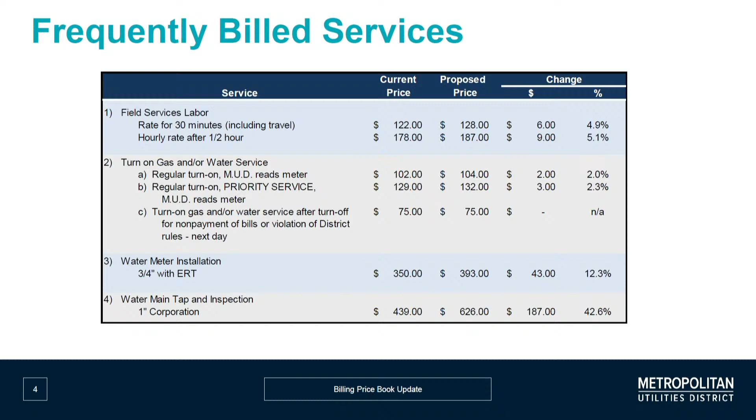Stephanie? Can I ask a question on number 1, field services labor? If I recall right, Bonnie, our contract gave them a 3.5% annual increase in their wages this past year? 3.25.

For their annual rate merit increase or for salary? Correct, for the general increase. Okay, and this is going up higher than that. Is it because of the all-in cost, benefits and everything else included? Yes, that is all included. Vehicle amount, we charge a vehicle rate, that's also included in that as well. So it's an all-in cost? Yes, that's correct, thank you.

Okay, on the next page, I'd like to discuss the more significant price increases being proposed, and these are defined as those increasing more than $200 or more than 15%.

Item 1 reflects the price of the damage to a special locking device for gas and water service. This price includes the cost of the lock as well as the labor for the field service technicians to perform this work. Again, this price increase is driven primarily by the cost of materials.

Item 2 is the installation of a 5/8-inch and a 1-inch water meter with ERT. As previously mentioned on the 3/4-inch water meter, the increase is driven by the increase in the cost of materials. Again, these materials are installed in newly constructed homes and are typically charged to the builder and not directly to the homeowner. Item 3 reflects the fee for the tapping and inspection of a water main with a 3/4-inch corporation.

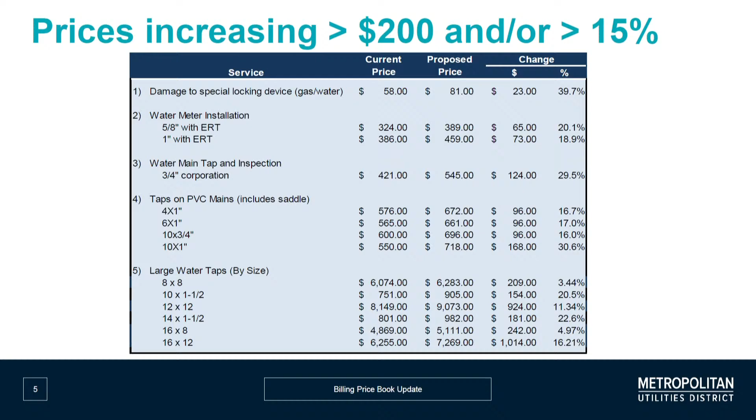And then finally, following board approval, we'll place the revised billing price book on the external website with an announcement that the fees will change effective June 1st. This will allow customers and contractors to review pricing in advance of the June 1st effective date.

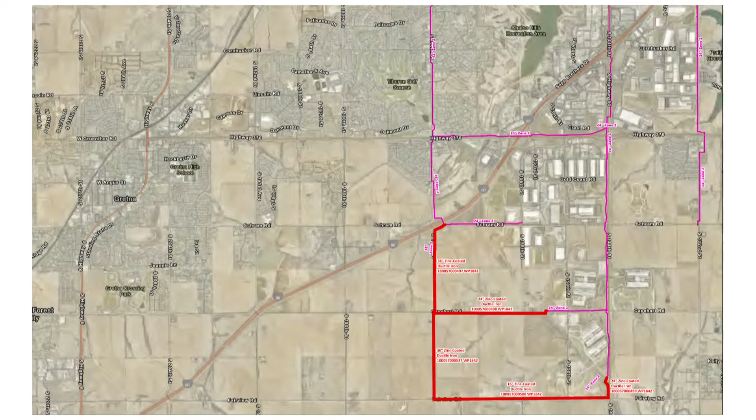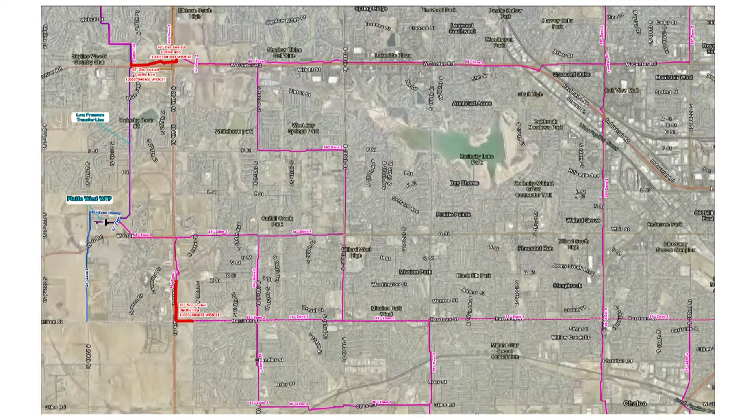These 3 projects combined total just over $16.5 million in construction costs, and added almost 5 miles to our transmission main system, ranging anywhere from 42 down to 16-inch ductile iron pipe. The total cost for all of these jobs came in at just 0.1% above the original contract value, and they were all successfully completed by Judd's Brothers Construction.

At this point, I'd like to give a shout out to Nick Clifford, a big thank you to him. He's on the plant engineering team and did a really nice job managing all of the construction on this. Also, Bob Taylor in our water department, who's been running this master plan, and this is a big piece of all that coming together.

The couple other projects I want to highlight, items D and E, were new development projects. One was in the Cherry Creek area, right next to our CC2 construction area, and the other was in Woodbrook Valley near 180th and Ida. The 2 projects totaled about 2.25 miles of 6-inch and 8-inch main added to our system to serve these development areas. Both were successfully completed by Cedar Construction.

The last item I'll bring up is item G. This project was to recondition a low service motor, the number 2 motor at Florence Treatment Facility. The initial base bid was just to pull the motor, get it hauled off, and then they had to tear it apart to see what all needed to be done to successfully rehab that motor.

We did get alternate bids up front for some common items we would do on that. After they disassembled, cleaned, tested everything, and finally painted it, the additional scope to get that motor rehabbed came back, and that's why you see a little bit higher percentage-wise on the bid. But the total amount was $150,000, so we still came in favorably on that one.

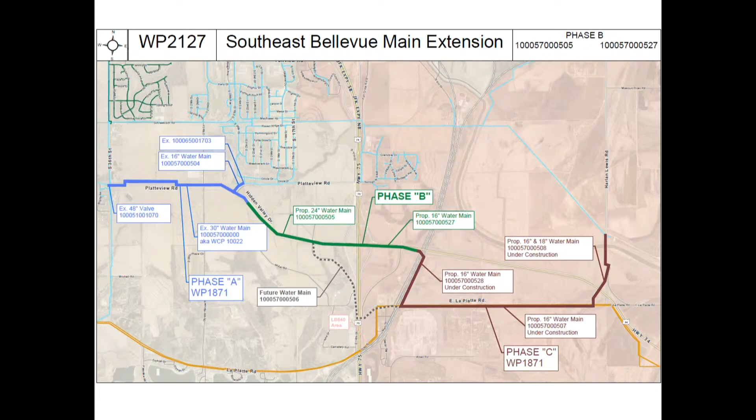I've got another map, and I'd like to highlight the last project, number 5 on the letter. This project was previously approved by the board at the September 2024 meeting for $2,879,900. We used historical costs with similar scope and size to present that to the board previously.

The project has since been bid and costs have come in higher than previously approved. Therefore, we brought the supplemental CNA forward with the updated cost around $3.48 million. As part of it, the district costs increased incrementally around $570,000 as the district is pioneering this 24-inch water main on the project.

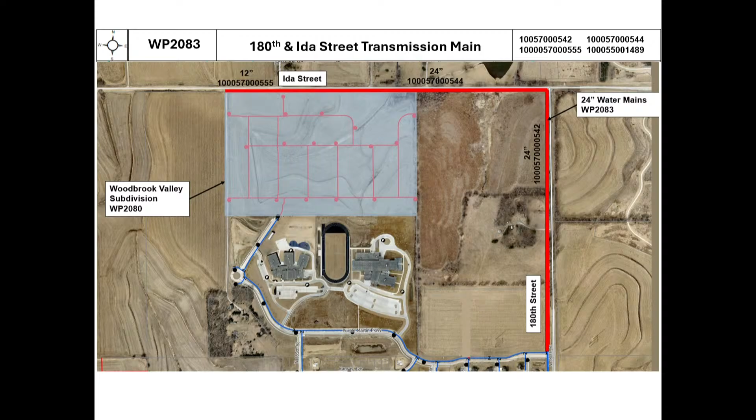We've seen more of this recently with some costs coming in higher than historical costs have been, and the engineering team is making adjustments to those estimates to reflect that, especially in some of these corridors where there's future grade cuts and fills for future road improvement. That way we make sure we're not coming back with more relocation projects than necessary. That's all I have to present, and I'd be happy to answer any questions.

To start with our gas system, we began in 2008 with over 560 miles of targeted gas mains. Today we have roughly 76 miles remaining. The Gas IR program is managed by the Gas Design Group within the engineering department.

Pictured here is what our original gas targeted system looked like in 2008, and today you can see the remaining mileage. In orange, we've highlighted our projects for 2025, and I'll show that again. So here's the 560 miles of targeted cast iron gas mains, and here's our system today. You can see the vast amount of work that has taken place over roughly 17 years - it's almost like repiping a small community.

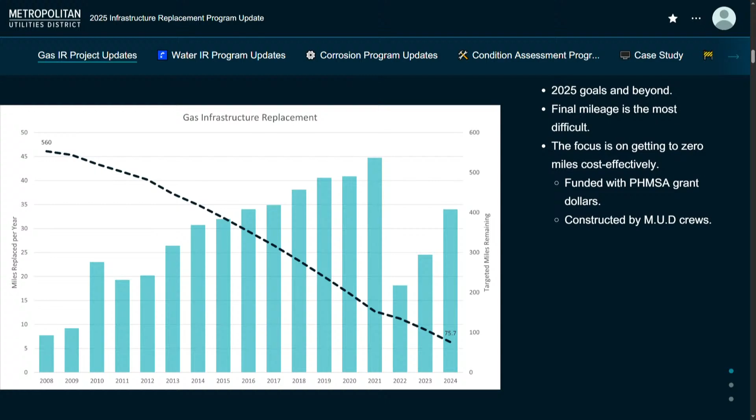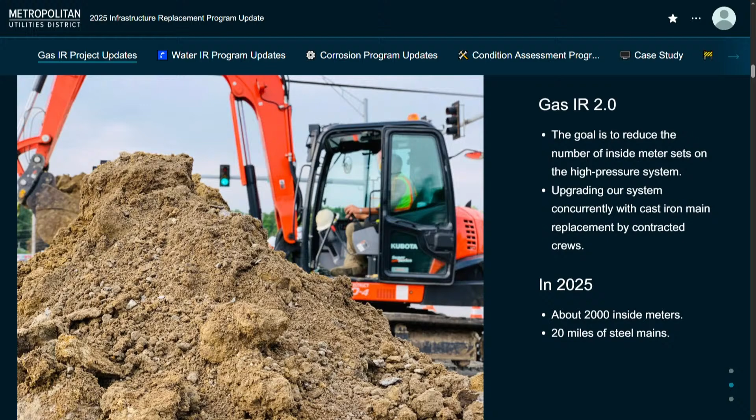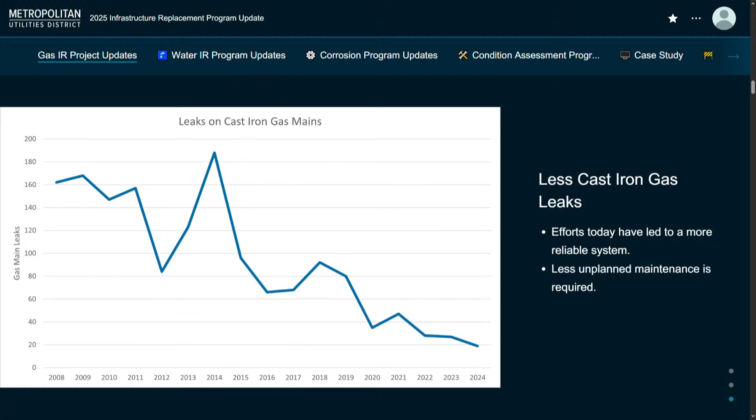If we look at the impact of the cast iron gas replacement program with regard to leaks on that system, we can see the dramatic effect it has had over time. Just looking at this visual doesn't do it justice. Speaking with folks who have been around during that spike in 2014, a gas leak is much more disruptive on a cast iron system than a normal leak today. So there are added benefits to this program not shown in this graph - we have a more reliable system today with less unplanned maintenance required.

Evan, for 2.0, what's the timeline? Has that been established yet? That's a great question - I might have to look, but about 10 years on that program. Okay, thank you. Yep.

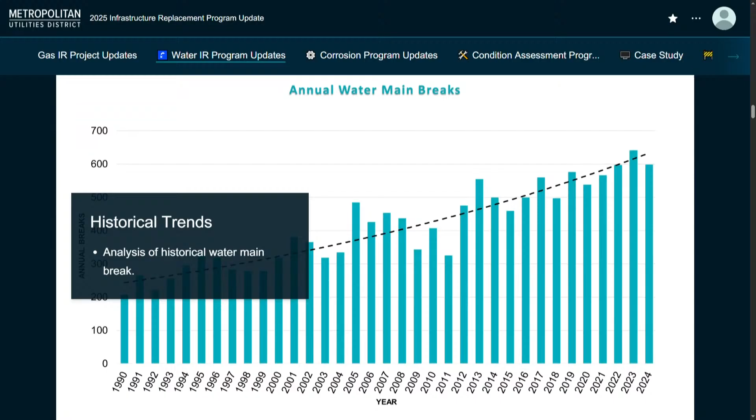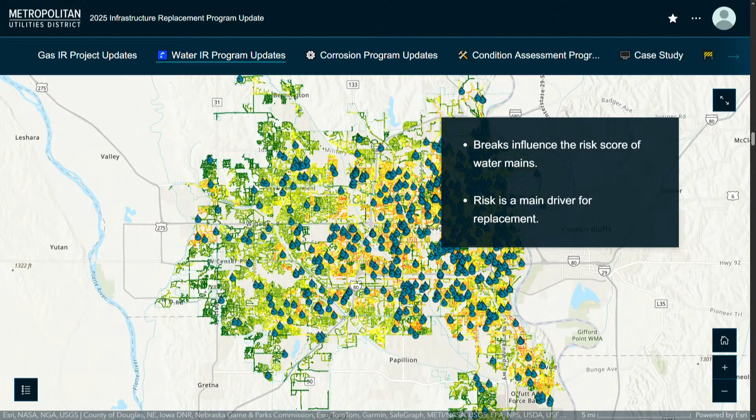We had a total of 598 breaks in 2024, and you can see the distribution of those across our system in this graphic. With each main break, our construction crews collect data while they're out in the field. Our team gathers that data, analyzes it, and puts it into our GIS system so we can visually see where our highest risk mains are. Every segment of pipe in our system, we assign and calculate a risk score, pictured here, which we can then use to target main replacement.

In 2024, we replaced about 16.6 miles of water main. In 2025, we're planning for 17 miles of replacements. We're continuing to refine our designs and installation methods, refocusing our condition assessment program on some of our higher consequence mains - I'll touch on that later in the presentation - and continuing to plan to increase our water main replacement goals.

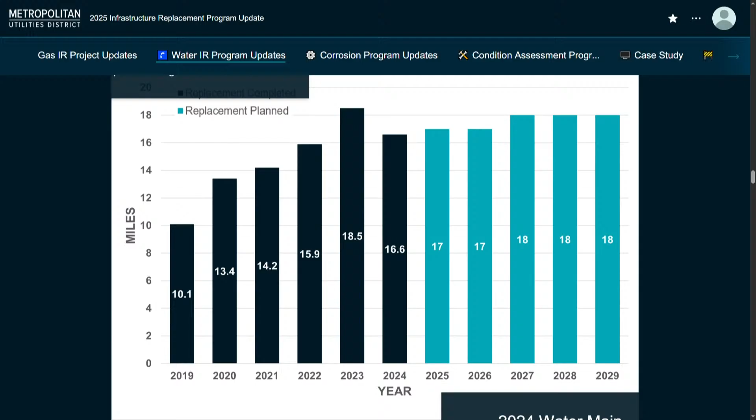Evan, on the 2025 target of 17 miles, how much is M.U.D. crews and how much is outsourced? So we're planning on 7 miles with M.U.D. crews and then 10 miles with contracted crews. Thank you.

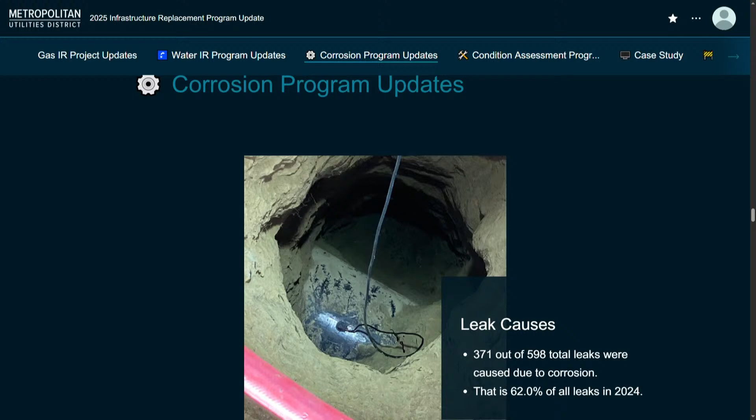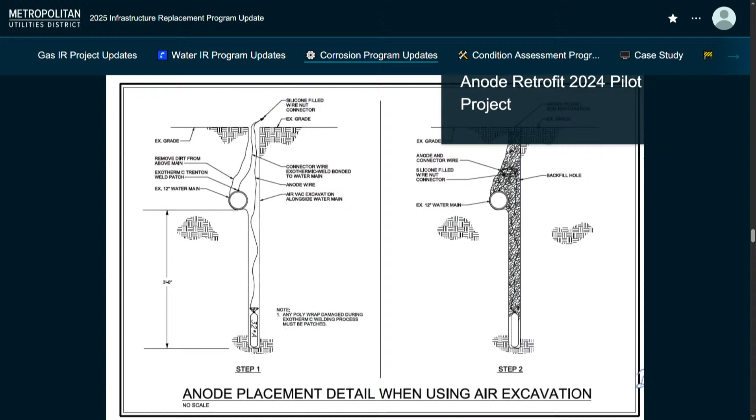Give a quick update on our corrosion program. A majority of our water main breaks are due to corrosion, so I wanted to highlight a pilot project we did last year. We performed an anode retrofit project, basically installing a sacrificial anode on our water mains that can protect them from corrosion. This isn't new technology, but the installation method pictured here is new to the water side, where we can pothole and install these from above ground in a more cost-effective manner. It's another tool in our tool chest that we'll continue to look at going forward.

Now I'll highlight the condition assessment program. We continued with our program last year in 2024 with both distribution and concrete main inspections, pictured visually here. I'll show some of the history of the condition assessment program. We've been doing concrete main inspections for a while, and you can see the number of miles we've done in the past. In 2021, we started exploring condition assessment of other materials, cast iron and ductile iron, and we continue that today.

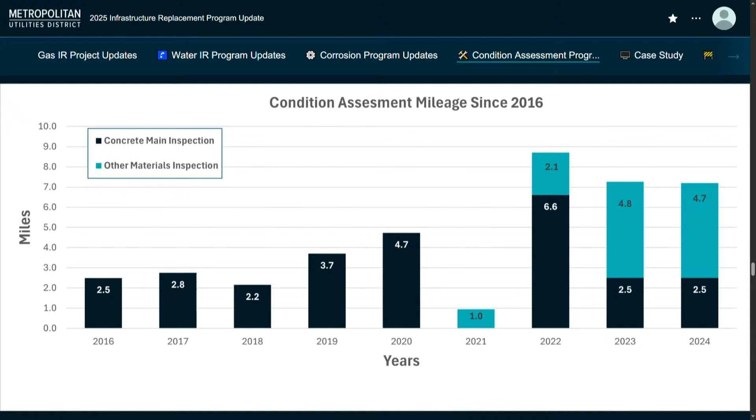Pictured here is the Pica SeeSnake inspection we did last year on a 12-inch cast iron main. We inspected about 1.5 miles. We get some really granular data with this type of inspection, and our MUD crews assist with the installation and the inspection as well.

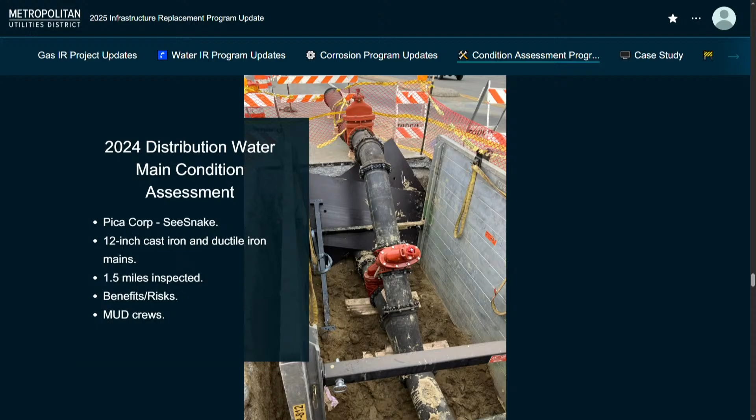We piloted the Mueller E-Pulse condition assessment on some of our smaller diameter mains. We did 3.2 miles of inspection. It's less granular, but has lower impact on our customers and crews for that type of inspection. So we're looking at a variety of different inspection methods.

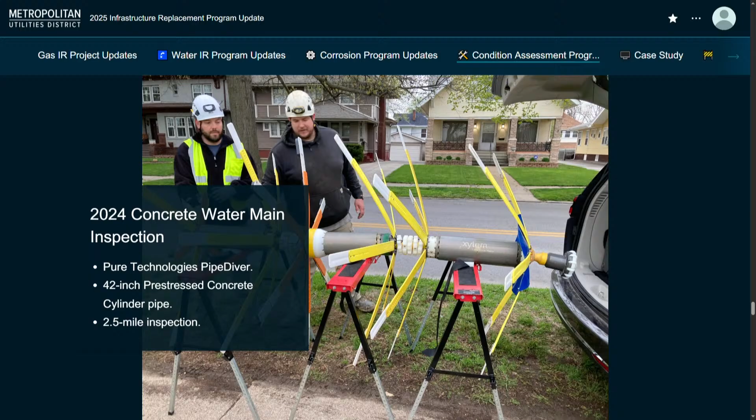Also in 2024, we continued with the concrete inspection using the Pure Technologies PipeDiver, as you've seen pictured before. We did a 42-inch concrete main inspection, about 2.5 miles for that inspection. Pictured here we have the insertion of the tool, and then this is the extraction of the tool.

Now, the case study I mentioned earlier on the inspection that started at Field Club—this was an inspection on a 54-inch concrete main that went from our Field Club reservoir to our 36 and Edna pump station. It was about 6.5 miles of main that we inspected.

I wanted to highlight some of the financial analysis we did. At a high level, replacement of a 6.5 mile, 54-inch main would be probably north of $60 million. We looked at the actuals for our inspection and repair cost, and those are around $900,000. So for about 1 to 1.5%, we can inspect and repair a main of that total replacement cost. I wanted to highlight the real benefit of this type of inspection.

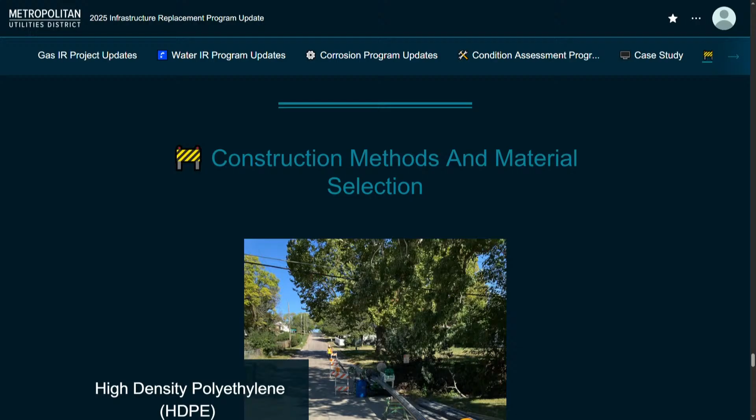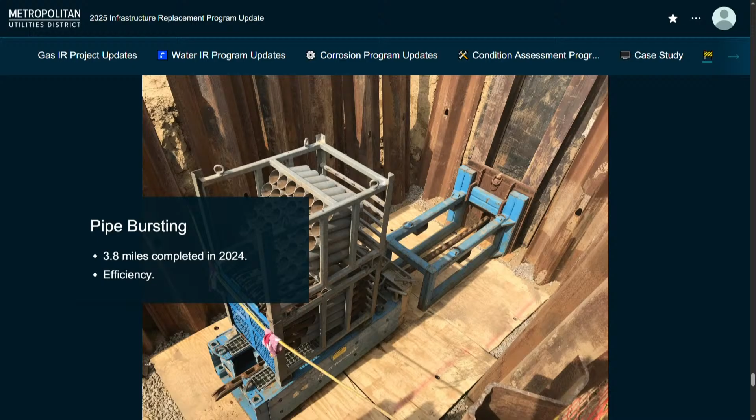We continue to look at construction methods and materials. Pictured here is one of our HDPE projects. We're continuing to use that, seeing benefits with design, constructability, cost, and durability of that material. We're continuing with our pipe bursting program—we did 3.8 miles in 2024. I'll just touch on those at a high level, and with that, I'll open it up for any questions you may have.

Evan, you said on the gas side we had a target of 17 miles replacement? I believe it's 12 miles for 2025 for the cast iron. Did you say gas or water? I said gas, but I'm getting to water. So for water, you said it's 12. How much is MUD and how much is third party? So for the gas side of the 12 miles, we're going to be doing all MUD crews for that 12 miles. For the gas IR 2.0 program, that's going to be contracted out. So MUD is planned right now to complete our cast iron program with MUD crews.

Thank you. All right, thank you. Thank you.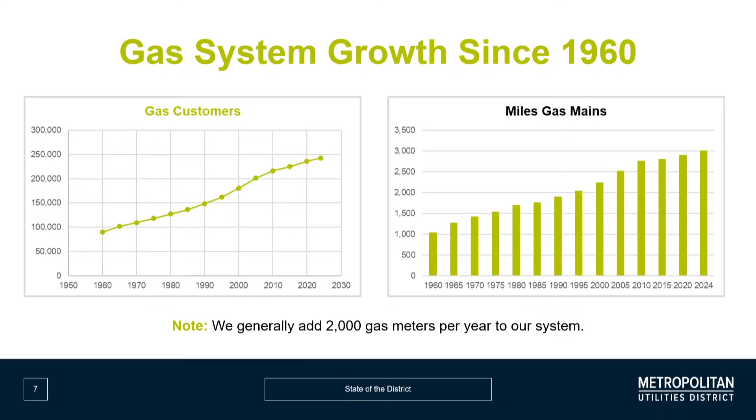Something that Vice President Jim Knight shared with us back in February when we were running the LNG plant. It got really cold around the 20th—I think February 19th was a Wednesday—and that LNG plant put out 97,000 decatherms in one day. I have to look back, I need to be sure I'm right on this. You sent it to me, so... but it was a long time ago.

Yeah, I'm sure it's right. So that day, or the next day, we were expecting maybe 350,000 decatherms—don't worry about the units, it's a lot—and a record would be about 397,000. So we were bumping up against 350,000. That LNG plant was able to produce 97,000 decatherms, which is a record, right out of the gate for a new plant. The previous record was about 60,000 decatherms, which I think was capacity, maybe. And the difference in the cost of gas—go ahead, Director.

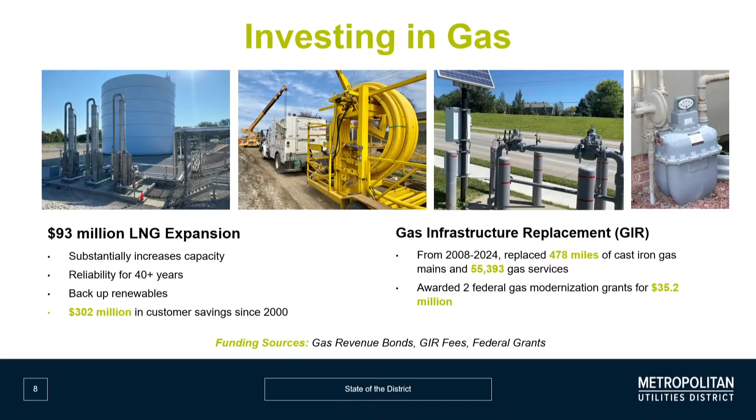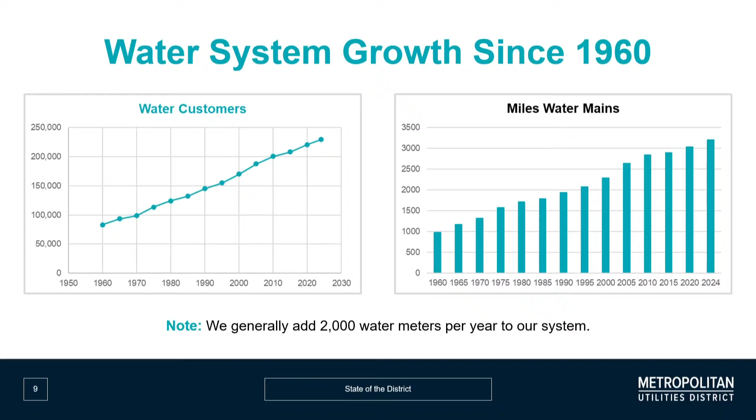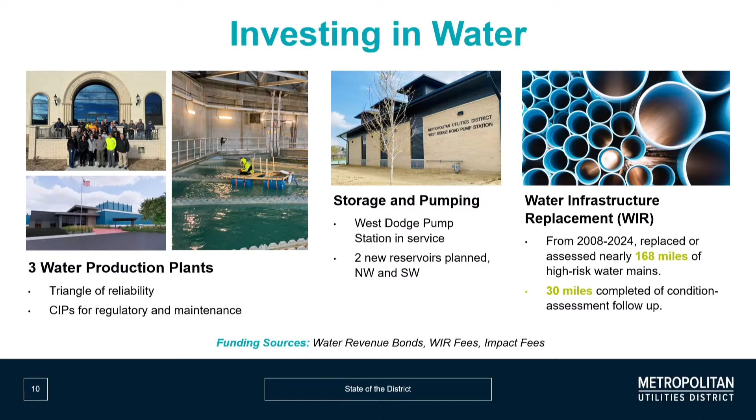Doug Whitfield told me that Florence is at full capacity. Is that right? Correct. Vice President Whitfield informed me that Florence is at full capacity. That's really something. As you know, we went through a really difficult, long needed upgrade, and had some unnecessary disruption that put us into mandatory water restrictions. Now we're at full capacity. That team worked really hard, and I'm happy to say we're in much better shape now, and kudos to the entire team.

Storage and pumping, you know we opened the West Dodge Pump Station. We have two other reservoirs planned, and I think we've updated you on those recently. And then Evan covered the water infrastructure replacement program. I don't need to, he did part of my job here, so that was nice.

Lead water service replacement, LSLR: detect, correct, protect. I think we've talked quite a bit about this, thank you for your support on that. We are funding the replacement of customer-owned water services that are made of or contain lead. We're well on our way, major team effort. We're learning a lot as we go. I'll leave it at that.

As you know, you approved some four bids, either last month or the month before. So we're definitely ramping up. I wouldn't say we're full steam ahead, but we don't know what full steam really is yet.

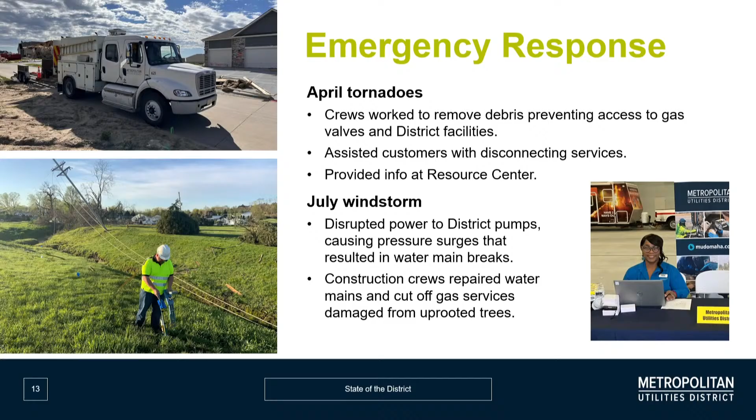We had 13,330 emergency gas calls. Of those 13,330, 1,170 were coded emergencies, meaning we need to dispatch and go. To put it in perspective, that difference meant about 8,775 fewer minutes to respond to all those emergencies than it would have taken in 2015, or 146 hours.

So that makes us all feel real good. It doesn't just happen, it takes an entire team effort from top to bottom. There are so many aspects of emergency response, whether it's water or gas, and these are the kind of things we measure and you should feel really good about, because we can't do it without your support.

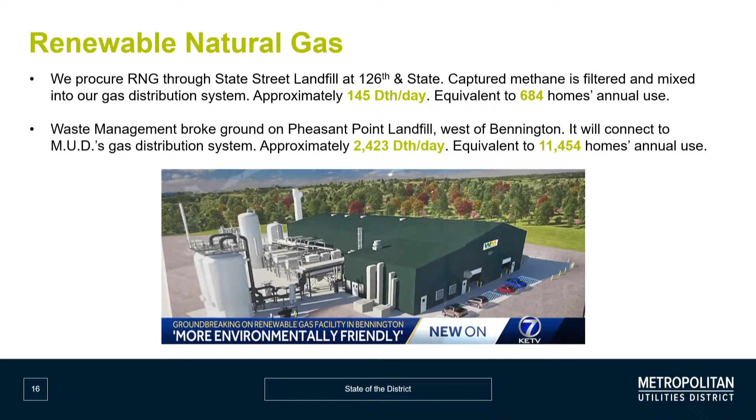And then the CNG aspect of our business continues to grow. That wasn't what we thought it would be initially. It's not a residential application, it's a fleet application. You might see the UPS brown trucks running around town that say natural gas on the side of them. A portion of our fleet, buses, big trucks, that's the equivalent of 5,281 homes. And it's going to grow, there's a new engine out that's going to make that even better. It's going to continue to grow.

Yeah, we'll just see how it does grow. It's good that we don't have to go out and market it like we did initially. It comes to us because we're ready for it.

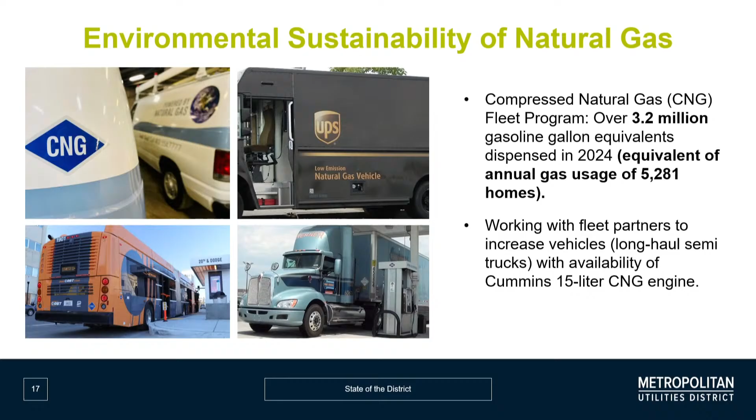Okay, I want to talk about customer satisfaction. We use a survey to try to determine the Net Promoter Score. Very simply, of all the survey respondents, you take the best feedback and the worst, and you subtract them, and you come up with a Net Promoter Score. We're asking our customers what they think on a myriad of issues, and we'll take action accordingly. We're trying to evolve this into where we're not overdoing it and not underdoing it.

But if you go to the next slide, you'll see that our response rates have increased. The number of promoters, or the best responses, has increased last year on that feedback, and the detractors decreased.

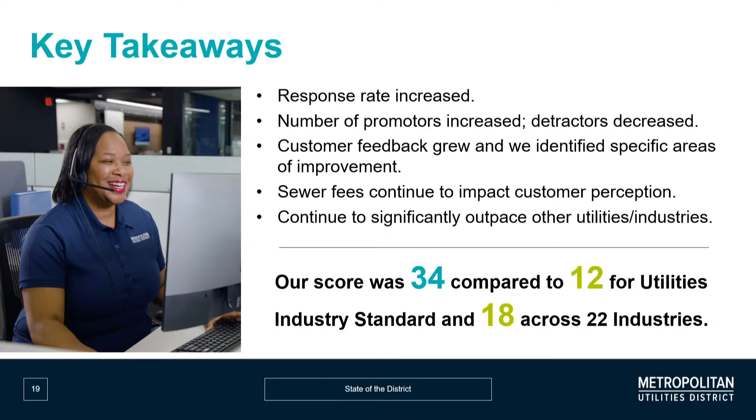Sewer fees continue to impact customer perceptions. It's obvious, and you know, we bill for sewer. We make revenue billing for sewer, but it's our reputation that matters. You can try to talk somebody into what it really is or isn't, but they just don't care—well, I won't say they don't care. It's on our bill, and that's okay, but I don't ever want to hide from the fact that you all are the ones that say whether it's there or not there.

It's a significant amount of revenue. It'd be a tough one for me to say what we should do going forward, but it's something worth talking about when you're talking about reputation in a world like this.

Have we ever increased our fees to the city for collecting that? We're working on a study now to propose some increases, so I think it's well worth it to them to have us do it. We are working on a study where we'll have more and better information for you, because we should—we're not a typical business, but we do run like a business in many aspects. So we'll have better information.

Of course, they're not a biller—we're a biller. That's how that happened back in the 50s. I don't know if it was called an interlocal agreement, but it just made sense for M.U.D. to bill for sewer for all the cities, and it was mainly Omaha at that time. But it was a couple cents on the bill at that time—more now.

I was having a conversation this week with some M.U.D. employees, and we're talking about the sewer fee on the M.U.D. bill, and this is a thorn in our side every month, every day. Is there any data captured? We talked about the pricing book at the start of this meeting. Is there any data that's captured to inform us that when somebody has to have their water service shut off, is that attributed to the sewer fee? Is there any data that we know that bill gets so high because of the sewer fee?